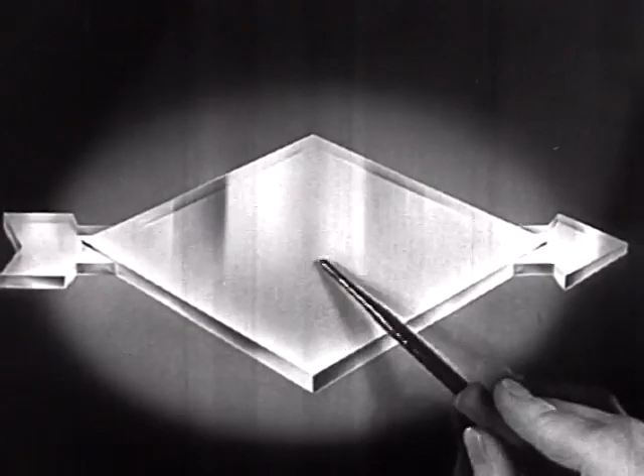Flash of power, the gleam of oil. In the sky, the power of oil conquering the heights. On the sea, the might of petroleum pulsing in great engines of the liners that traverse the deep. On land, oil feeds the fiery furnace or drives the diesel engines along far-flung rails of steel. And on the open road, well, you know what makes your auto run.

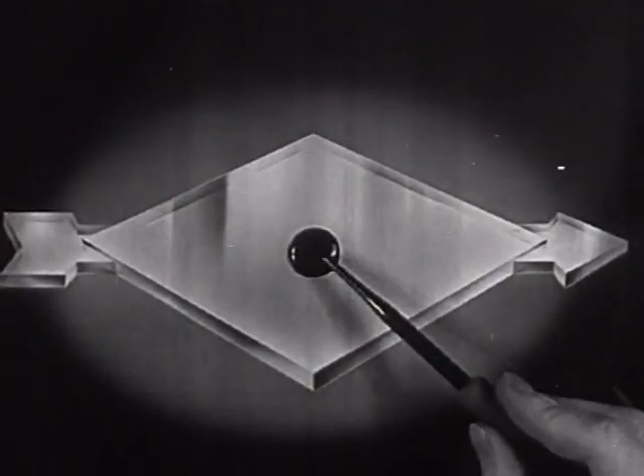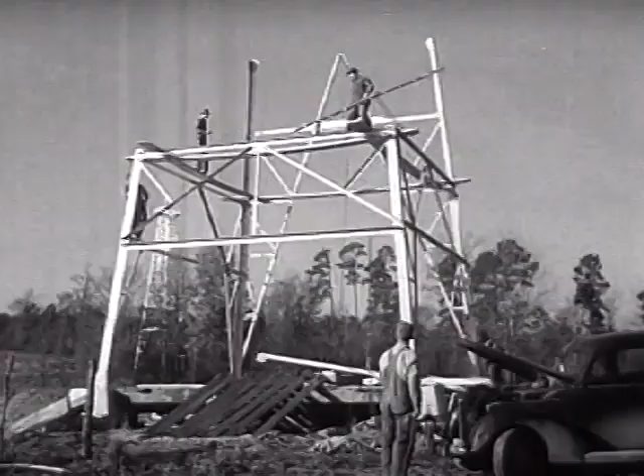For millions of years, this source of power slept peacefully in the dark recesses of the earth until modern magic loosed the liquid energy from its subterranean prison. Great areas became forests of towering derricks. And here's how the petroleum forest grows.

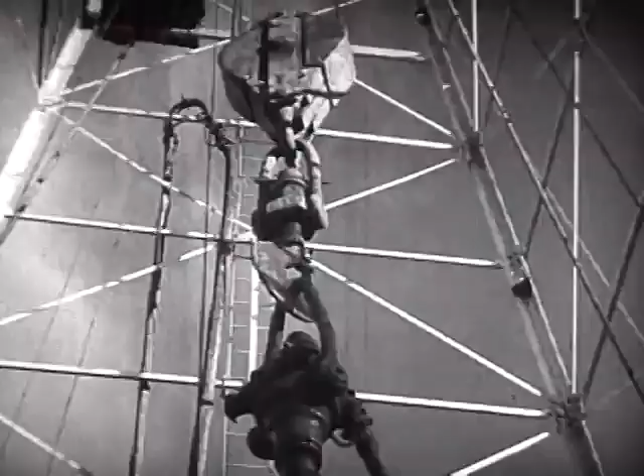A cellar is dug, and a rotary table to turn the drilling stem and the bit is set in place. Round and round the rotary goes, drilling deep down to oil. A steam engine drives the drilling mechanism. They're inserting a length of pipe, lengthening out the stem for deeper drilling. A new joint is waiting.

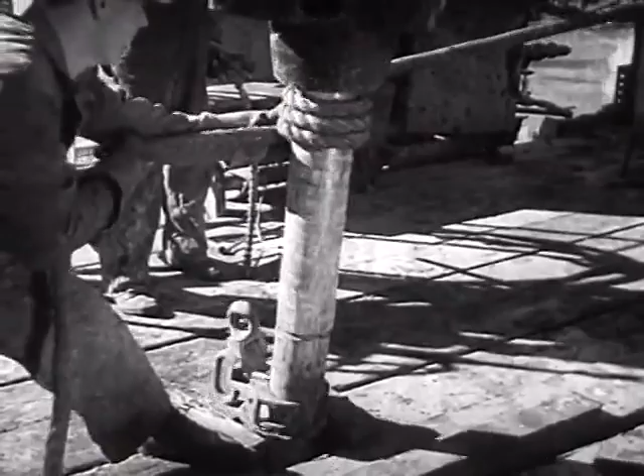Oil field workers are called drillers, roughnecks, roustabouts, rope chokers. The oil field treats our ears to odd and colorful names. Now the drilling stem has been lengthened, then round and round once more.

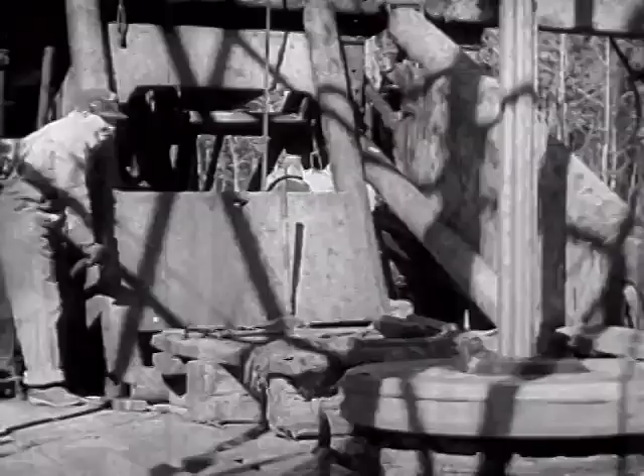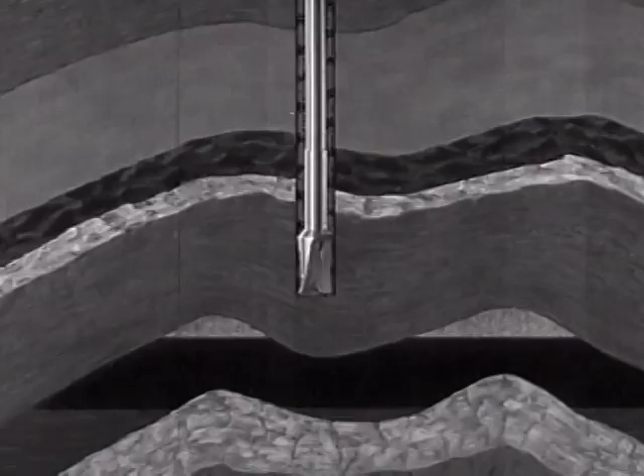Down through layers of sandstone, shale, limestone, down to astonishing depths. This well 5,000 feet. Some 10,000, 2 miles into the earth. And then, after weeks of drilling, fighting against natural obstacles, the drill at last reaches the oil sand, porous rock, which holds the oil much as a sponge holds water.

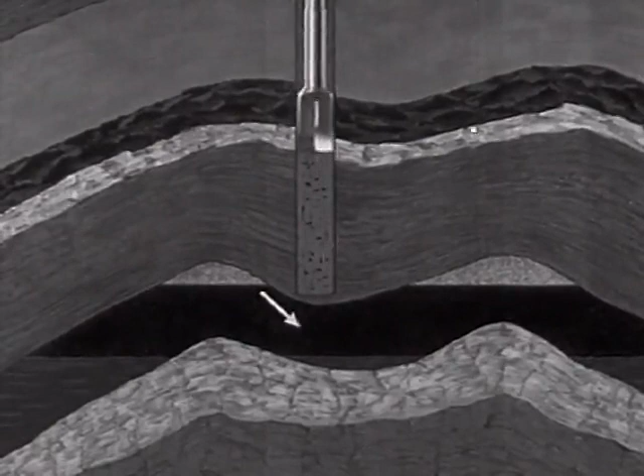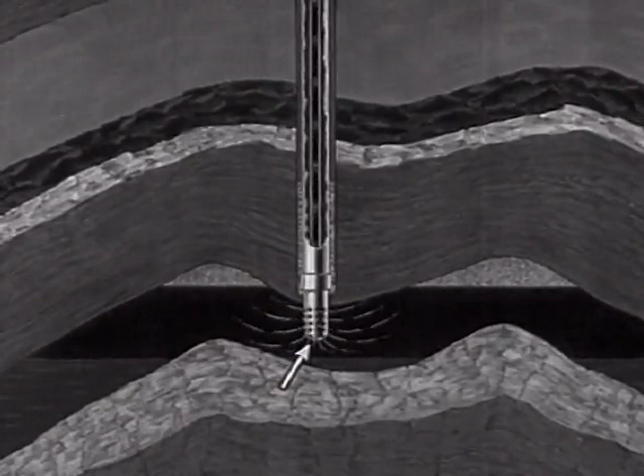Next, the casing is lowered to the bottom of the hole and cemented in position. Then drilled through the oil sand, and a screen is installed at the base of the casing. The screen extends down into the oil sand. The oil flows through the screen, up through the small pipe tubing to the surface.

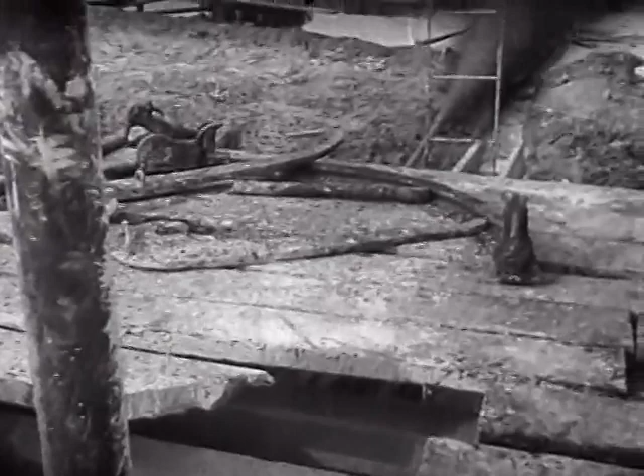So they've struck oil, and now the well must be cleaned of the mixture of drill mud and oil. Some wells flow of their own pressure. Others must be pumped, need power.

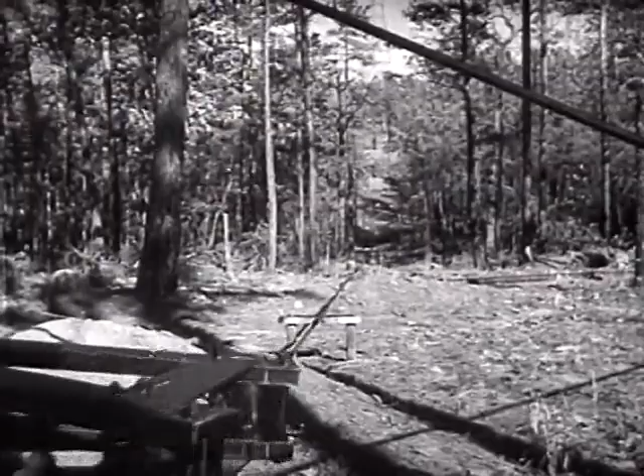The power is transmitted to groups of wells, the ever-swaying rocker arm, the rhythm of pumping, the unceasing heartbeat of the oil fields. A 24-well hookup is the height of oil field power, pumping black magic from 24 drillings in the earth, all at the same time.

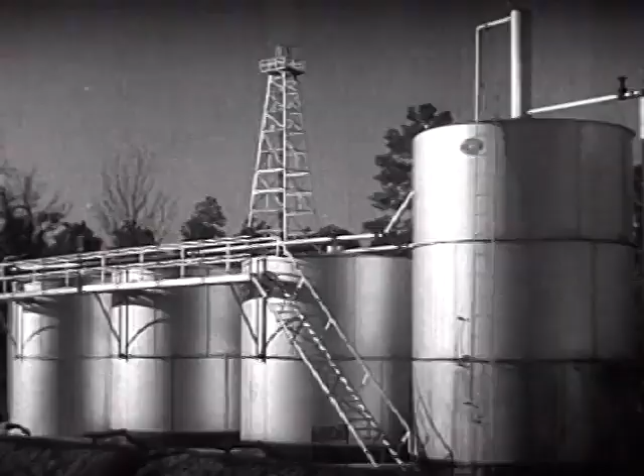Out of the ground, the oil is cleaned of natural gas or water, which is combined with it. Next, the petroleum starts on its way through a great network of pipelines. There are powerful pumping stations every 40 or 50 miles to keep it moving along the lines.

The lines of pipe, alive with racing oil, run through forests and over plains to these silver discs. They're storage tanks where the oil rests briefly before it rides the waves in giant tankers. And they're masterpieces of shipbuilding, those tankers of steel. The largest navigate the sea at 15 knots and carry 5.5 million gallons of oil.

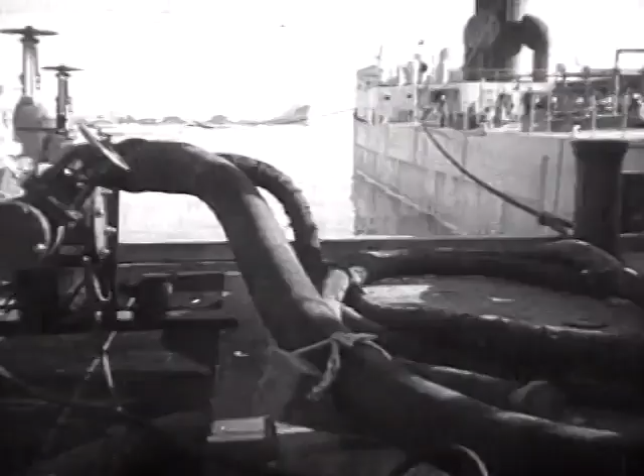The voyage of oil to the refineries. The refinery with its modern structures, technological towers, minarets of science, docks, office buildings, pageant of industry. Day after day, there is an endless flow of oil as the tankers discharge their liquid cargo.

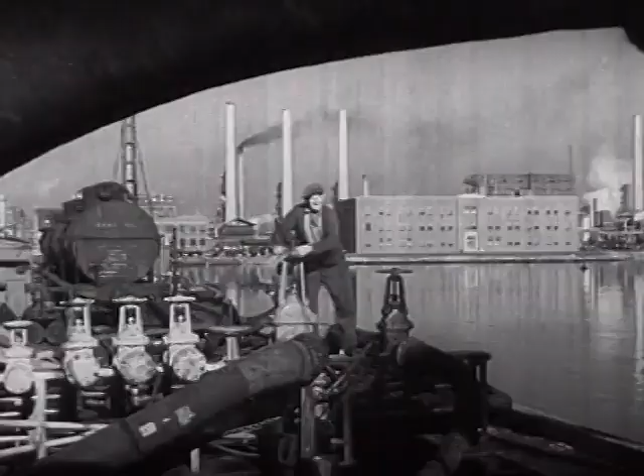Unloading oil is a vast operation of piping through huge hoses. Discharge pipes on the vessel and receiving lines on the dock are connected, and a cargo of 5 million gallons is discharged in less than 24 hours.

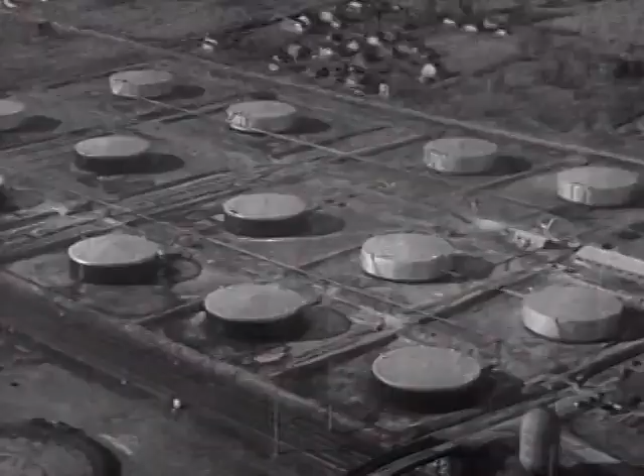No two cargoes of crude oil are alike, so each boatload must be stored in different tanks, and each batch must be processed individually, with laboratory tests to indicate the precise treatment for each.

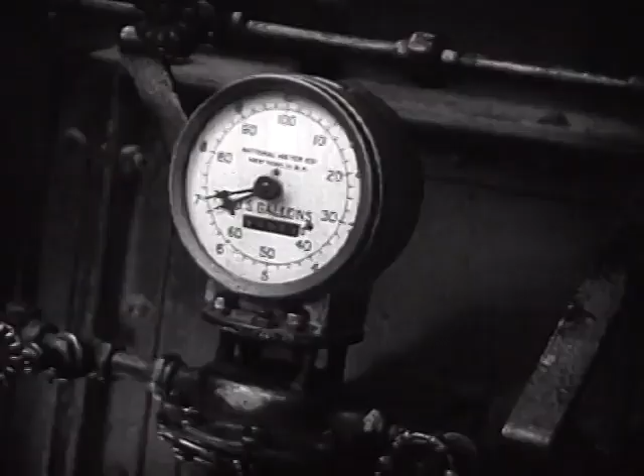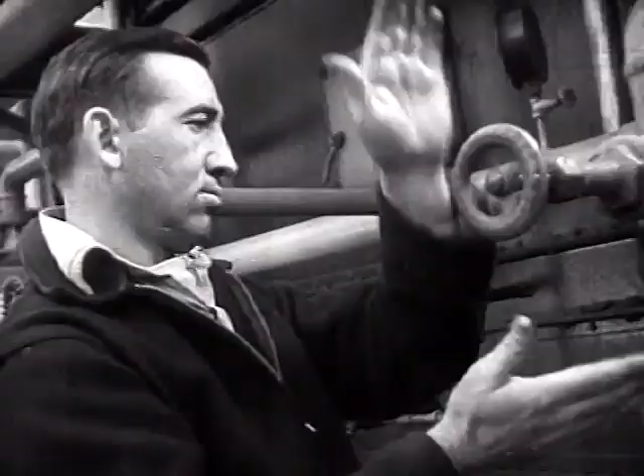That is embodied science. Those masses of strangely wrought steel, forests of stacks, glowering and hissing boilers, leaping and winking fireboxes. Intense heat, the flames roar in the furnace, yet the oil flows so fast the heat does not scorch it. And scientists wrest from the crude petroleum its tremendous power in the form of gasoline and other fuel oils.

And that's done in these towers called fractionating towers. They divide crude oil into the lighter and heavier parts. Those of different boiling points liquefy at different levels in the towers.

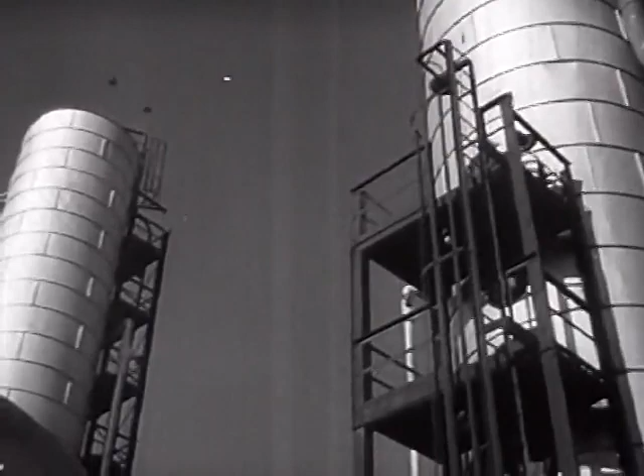Some lighter than gasoline liquefy at the top. Heavier parts liquefy further down. At the bottom are the heavy fuel oils, or the raw materials from which lubricating oils are made.

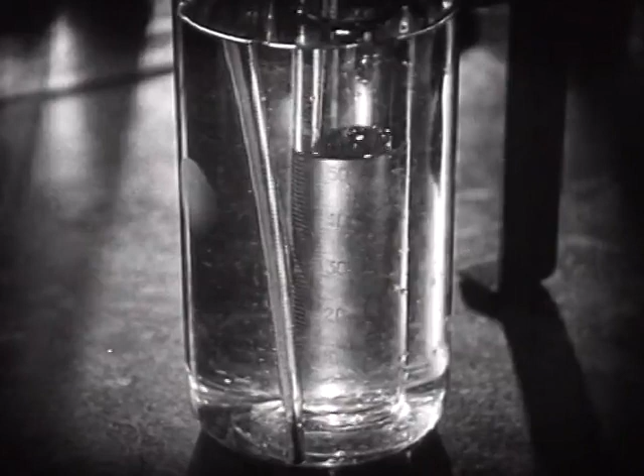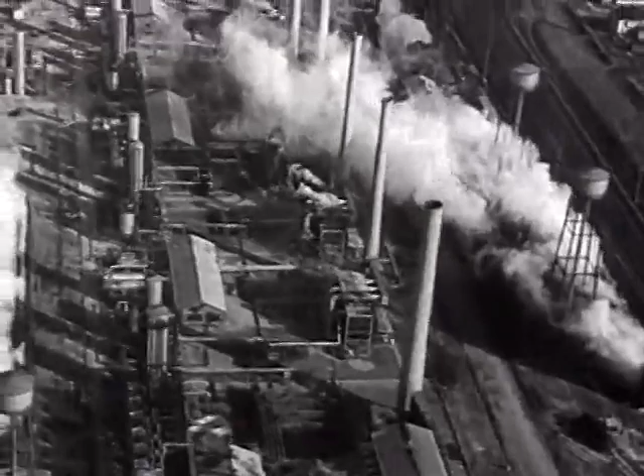When increasing use of motor cars pyramided the demand for gasoline to extraordinary heights, scientists were called upon to devise new methods. How could a greater proportion of gasoline be extracted from the crude oil than that obtained from the fractionating tower alone? To meet this challenge, the scientists turned to products other than gasoline which are drawn from the crude, studied their molecules, and found a way to change them, to turn them into gasoline.

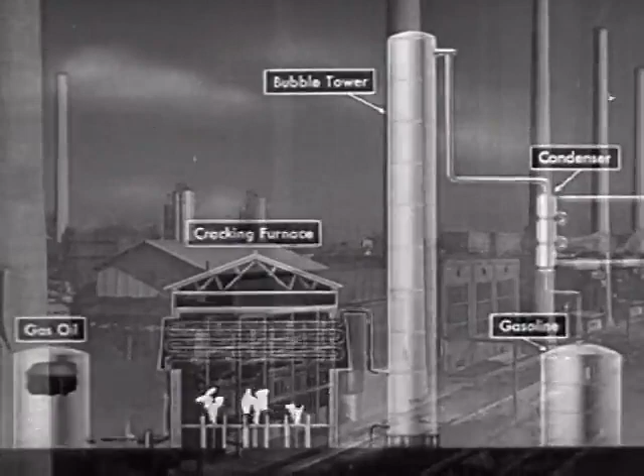The result was cracking. Let's look at a diagram of a cracking plant. Here we see how one part of petroleum that is not gasoline is converted into gasoline. Called gas oil, it is pumped through a pipe into a cracking furnace, heated to over 900 degrees under tremendous pressure, and the individual particles, molecules, are broken into smaller molecules, just as coal is broken under a hammer.

If we could see one of those molecules, it would look something like this. The hotter the molecule gets, the faster it wiggles, until finally it wiggles so fast it flies apart. The pieces shoot around at great speeds. They eventually find partners and form new and smaller molecules that look something like this.

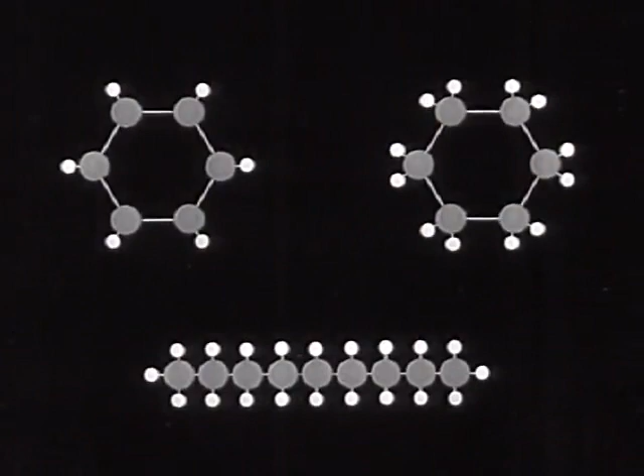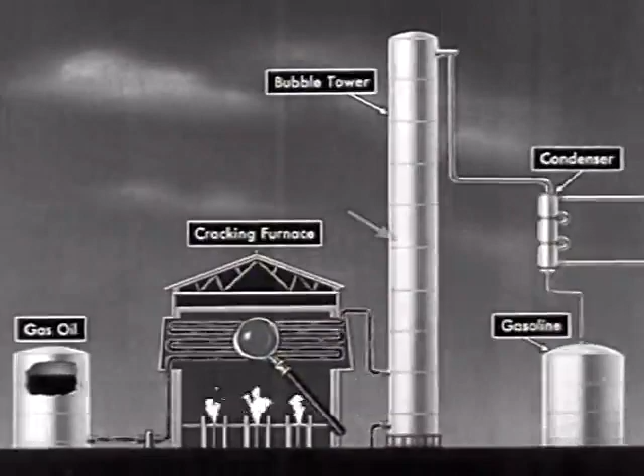These smaller molecules are now no longer gas oil, but are gasoline of high-powered, knockless quality. Some of the gas oil molecules do not fly apart and must be separated from the gasoline. This is done in the bubble tower.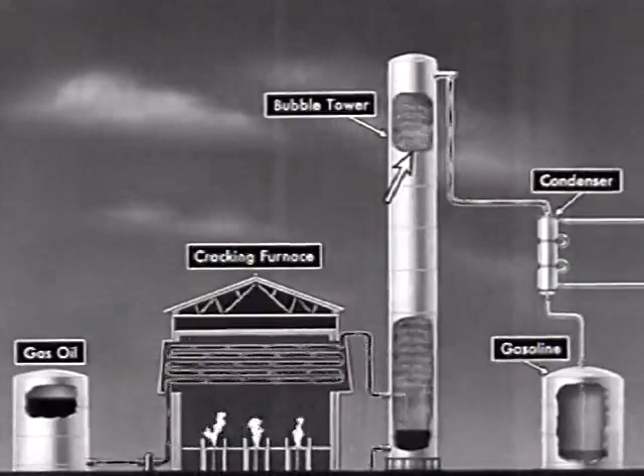Here the big molecules, which are not gasoline, are held back and come out at the bottom as a liquid. The gasoline goes up the tower as a vapor, comes out at the top, and is condensed into liquid gasoline. Gasoline that gives more power to you.

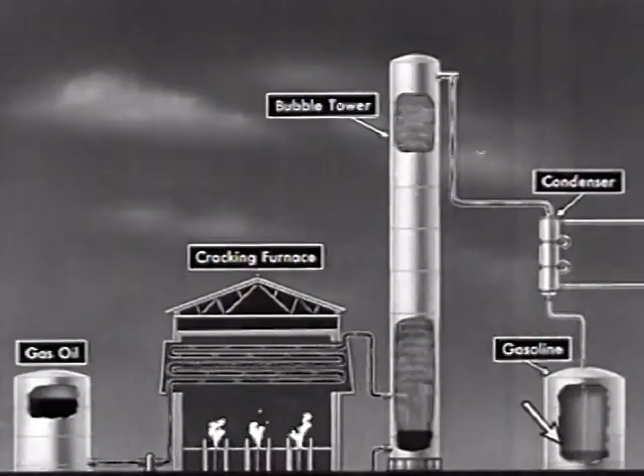Experiment is the key to it all, and this is the experimental laboratory. In the making of powerful motor fuel, the control of temperatures is of extreme importance, and it is measured to an accuracy of 1/100th part of 1 degree.

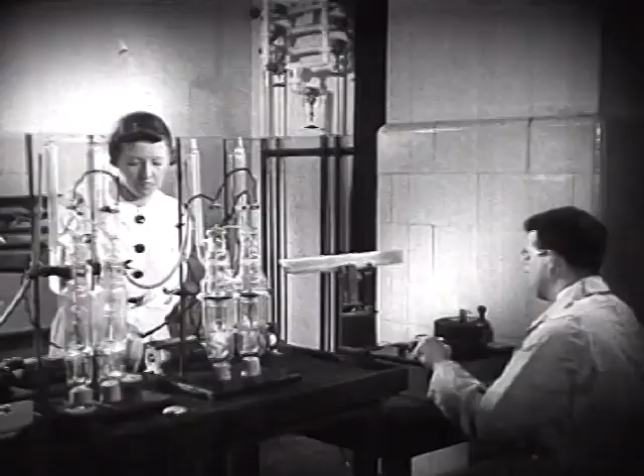Gasoline is broken down into over 200 parts in that elongated tallness of glass, and each individual part is studied. The laboratory with its strange gleaming of new and unpredictable things. Here are created modern miracles with the chemistry of oil.

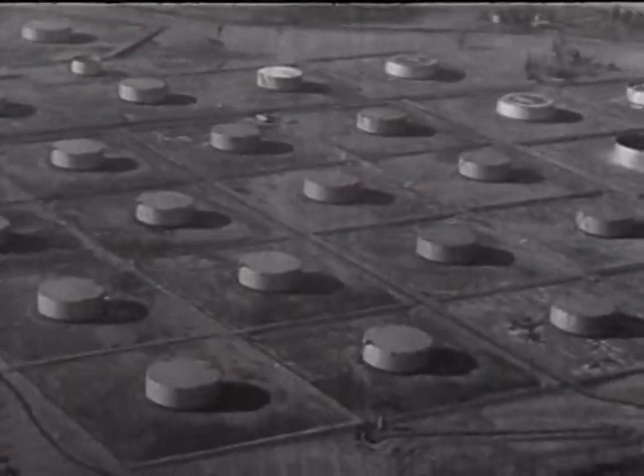Tank farm, to which the motor fuel goes from the refinery and then out to the nation by railroad tank car and by motor barge. Pipelines run their web-like nets under rivers, over mountains, carrying gasoline that goes into millions of gasoline tanks to generate billions of horsepower for the nation.

Oil means horsepower in a horsepower-using world. Briefly, in 4 words: more power to you.